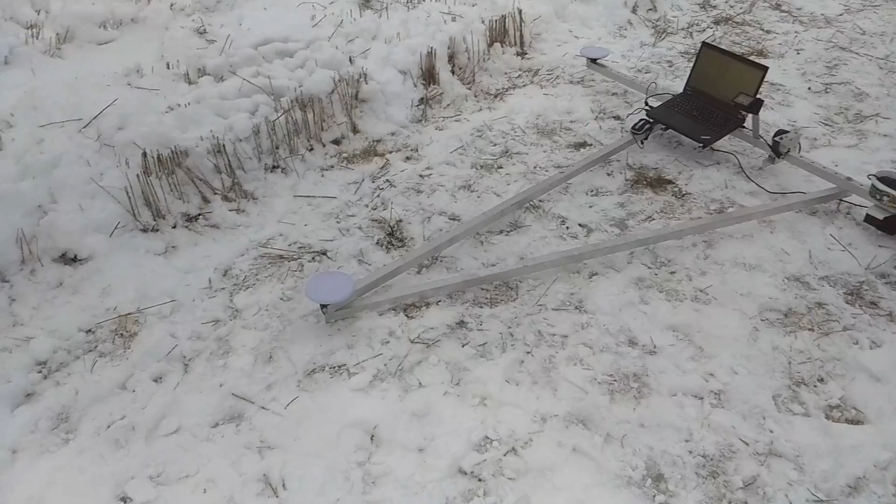But in short, it's possible to solve the location and orientation of the rig using the locations of those 3 GNSS antennas. In addition to a camera, this also has this rotating lidar attached to the rig. A laptop is used to log the data. Let's see how this works. This hare statue is about 35 centimeters or 1 foot high.

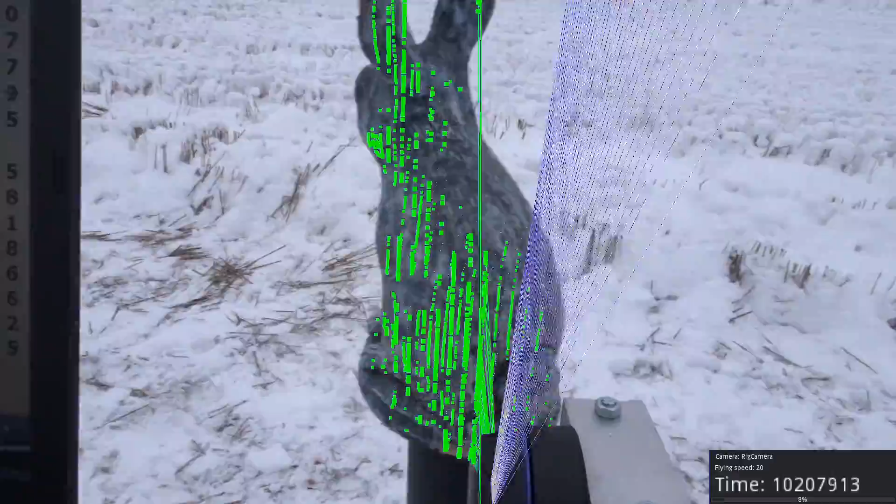The lidar is now scanning its surroundings, but because it's working in infrared range, we can't see it working. But since the measurement data is available, we can draw the measured points and visualize the laser lines on top of this video. Here green dots represent points that are considered valid and used as points in the point cloud. Lines are also color-coded: green for valid measurements, other colors represent different invalid conditions. All of the green dots were used to generate mesh for the hare model.

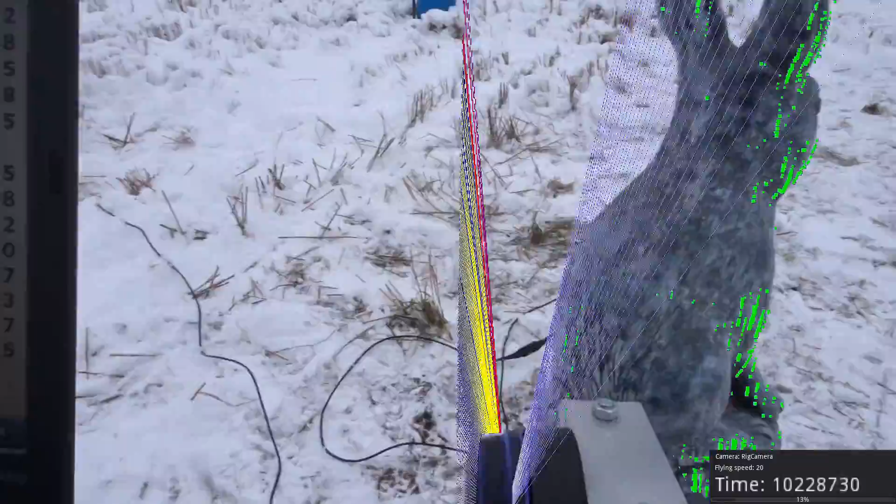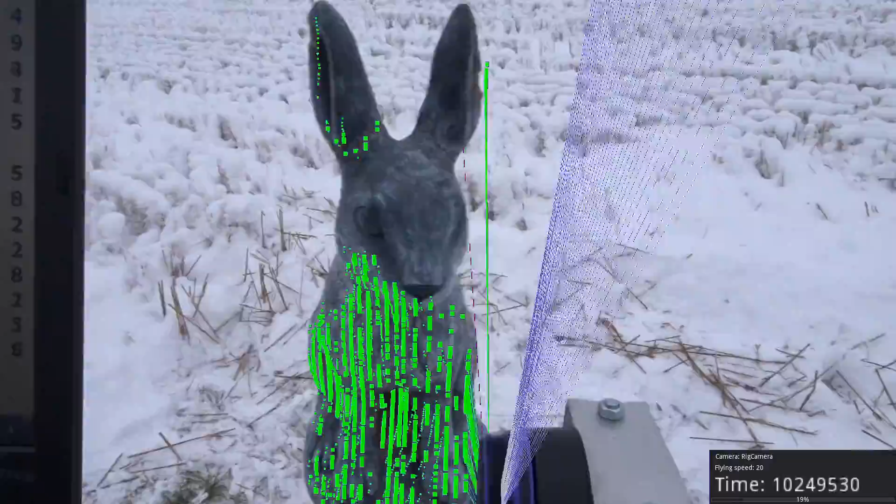The base antenna can be seen in the background here, on top of the black pipe. A remote RTK base could also be used. I didn't use one because the one I used was covered by snow and is practically inaccessible in this weather. Using a remote base would also make a wireless rig possible.

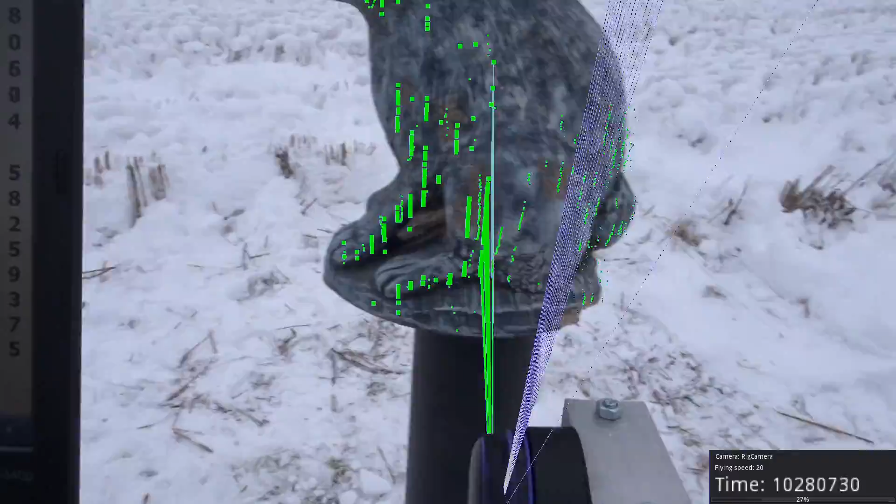Slight wobbling of the points in relation to the background is partly caused by the image stabilizer of the camera that can't be turned off completely. If it was completely off, the laptop screen on the left and the lidar and its mount would be almost stationary on the video. Here it can be seen that the lidar doesn't see the black pipe underneath the statue almost at all.

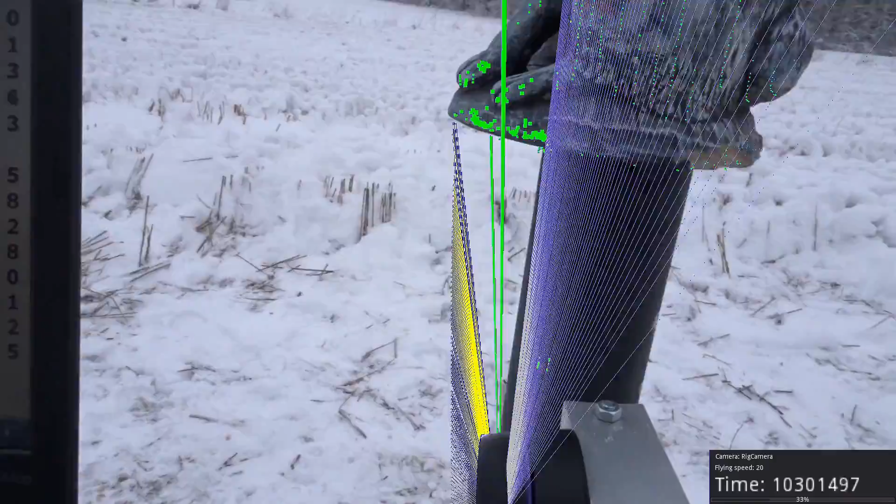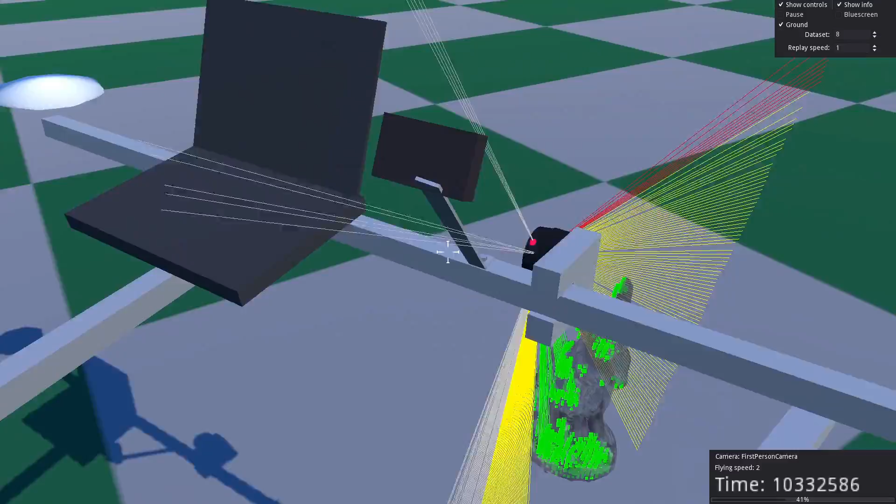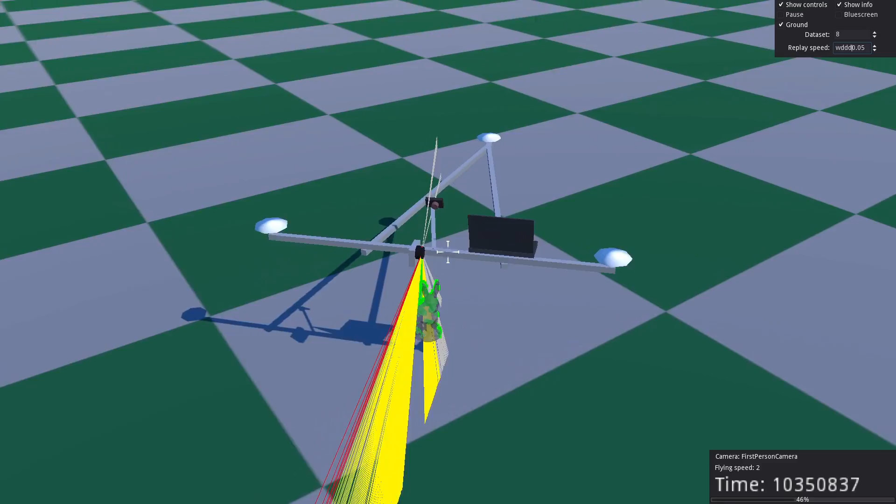This view isn't really interesting, so let's switch to virtual mode instead. In this mode it's possible to fly around quite freely. So if we back up a little, we can see the rig in motion. And we can also slow down the time. Then we can take a closer look at how the lidar is working here.

So it's basically scanning in a circular pattern. It rotates about 20 times per second, so here it is about once a second, since this is 1/20th of the speed.

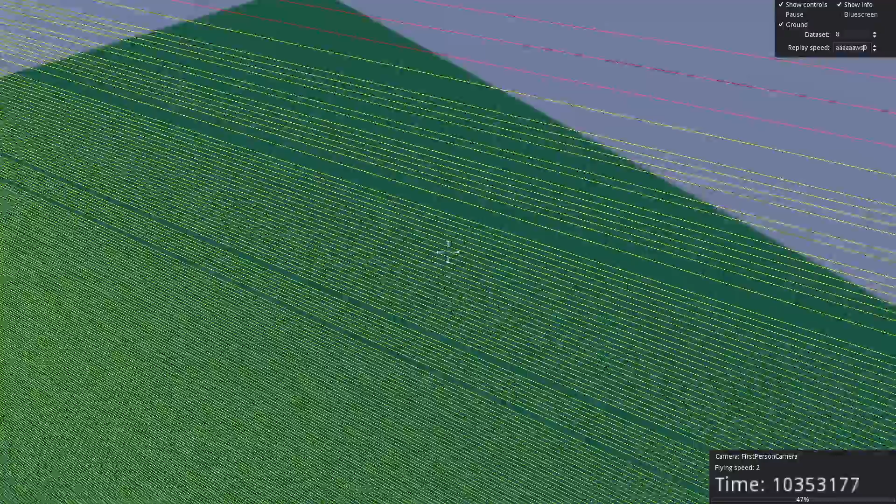Now it's scanning only the ground, so the lines are red and yellow. Red lines indicate that the measurements are outside of the range that can be defined here. So soon it will start taking valid samples again. Oops.

The black eyes actually seem to be quite problematic for this lidar. They don't seem to reflect that infrared radiation too well. It can be seen on the final point cloud also. There's practically a hole where the eyes are.

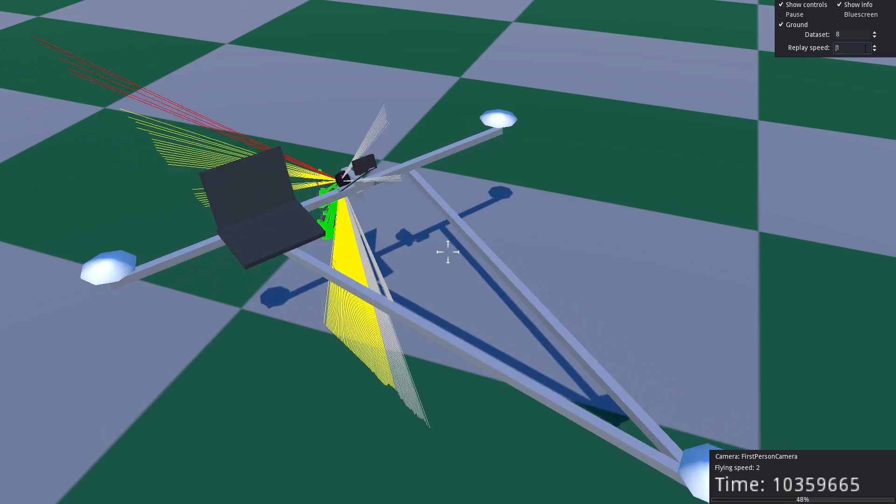So let's get back to this camera view. The ears are also problematic. There's the same black color there that the lidar can't see. So now the points are collected and we can take a look around this.

Texturing of this hare was done in Meshlab by hand. Basically it could be automated somewhat because the location and orientation of the camera is known for every moment. Collecting the data and generating a point cloud out of it is maybe a bit out of scope of this video, but let's take a quick look at the point cloud itself in Meshlab.

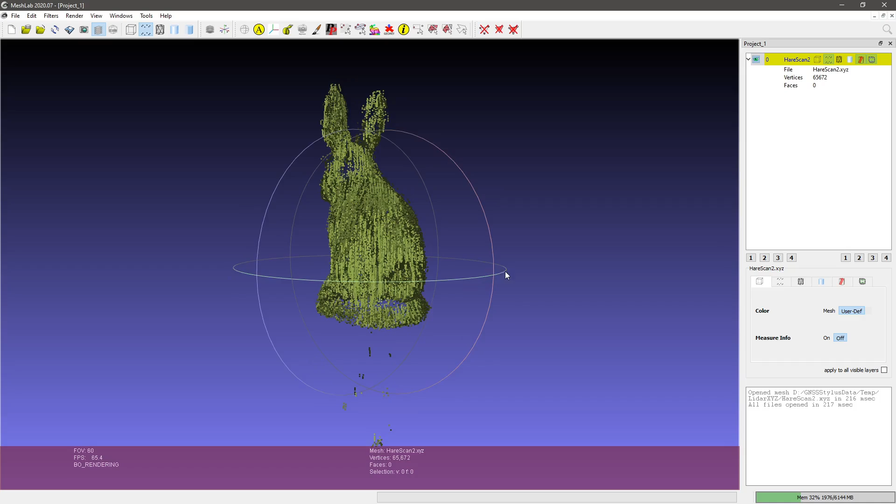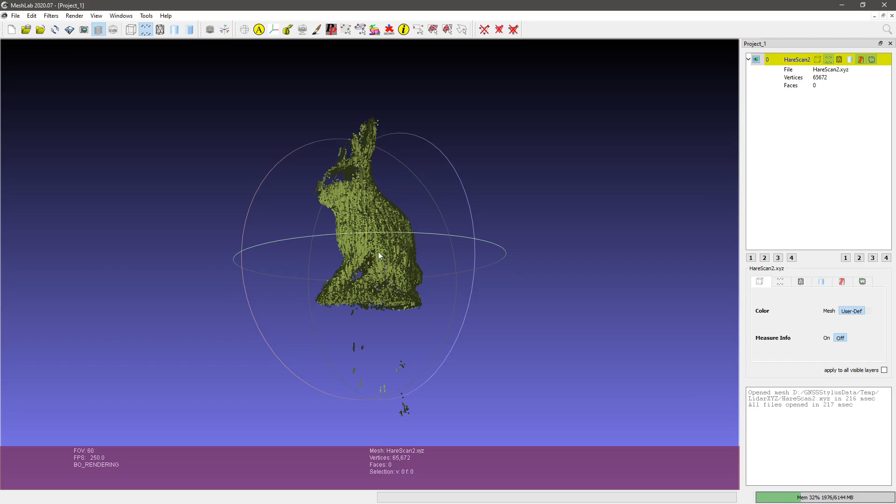Here's the point cloud gathered in the previous process. As you can see, it's about 65,000 points or vertices. These points here are practically outliers. They were sampled from the pipe supporting the statue, and since they are so sparse, it's better to get rid of those. They spoil the surface reconstruction process.

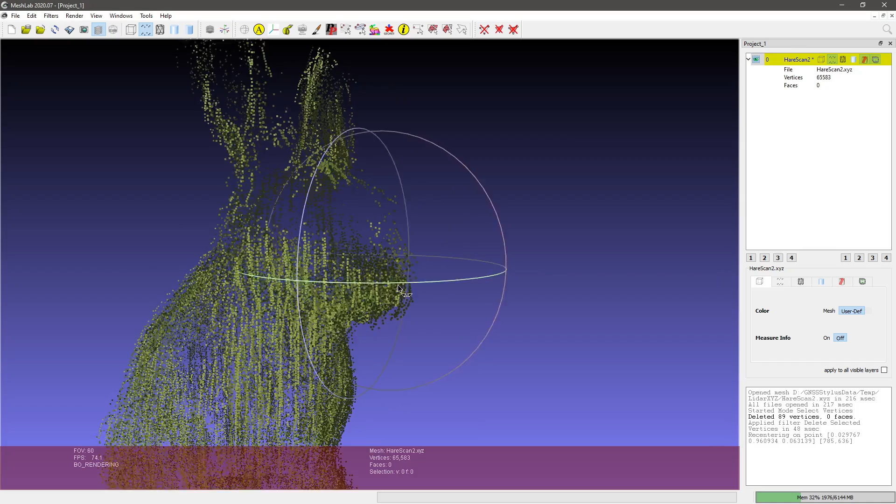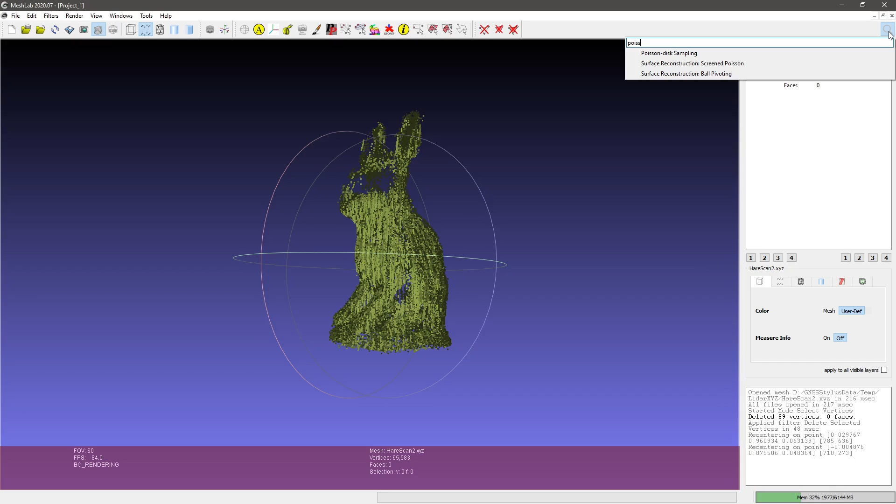And those eye areas, it's interesting that they are practically holes, and the holes are much bigger than the black eyes on the statue. I don't know exactly why this is the case, but it is what it is. So let's try to construct some surface out of this.

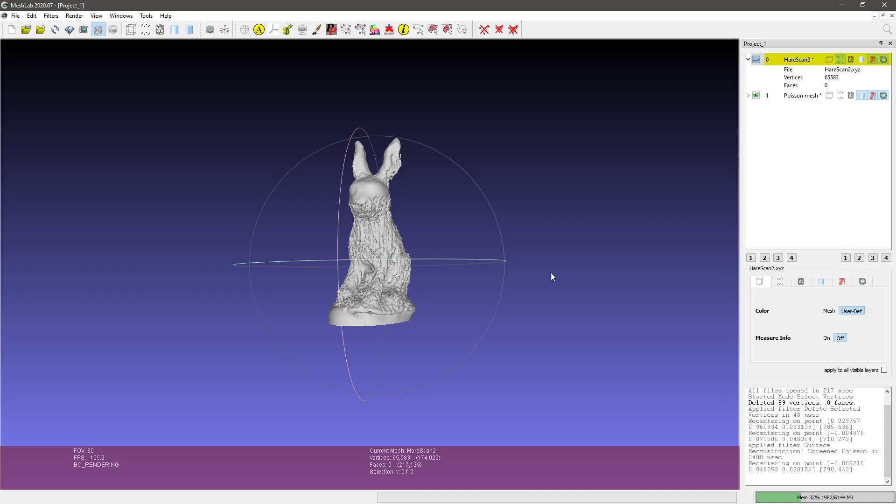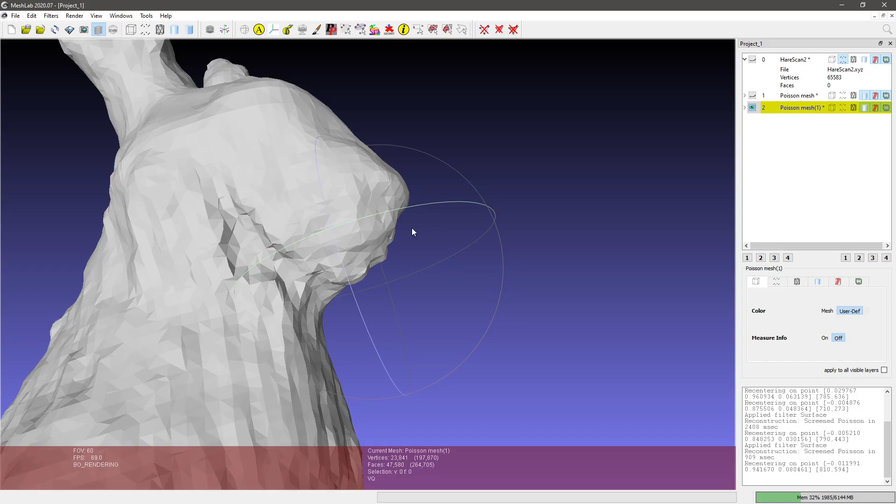If we try to construct too detailed a surface, it looks quite weird, or at least this is not a very healthy hare, so it's better to use a bit less detailed parameters like this. And since it still, at least here, has too much detail, we can smoothen it a bit, like using this operation.

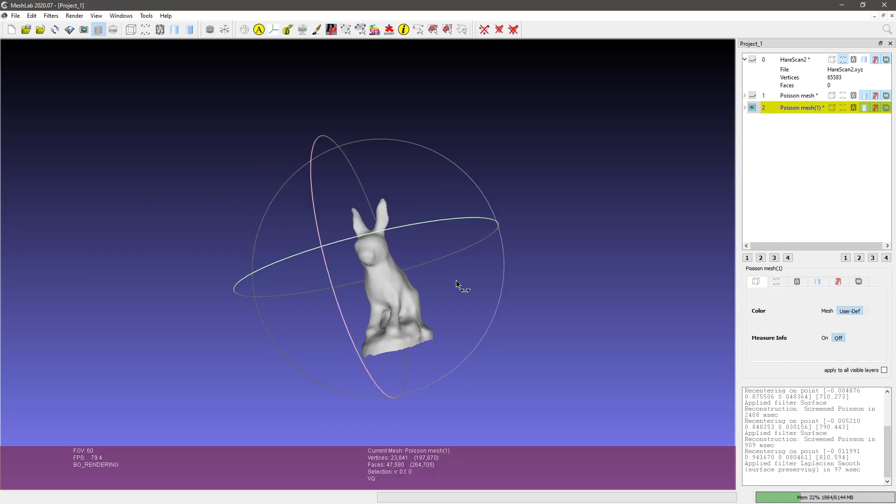This is very close to the mesh you saw in the previous parts of this video. I used the same parameters to generate it, but there might be slight differences in the lower part because the points removed may not be the same ones.